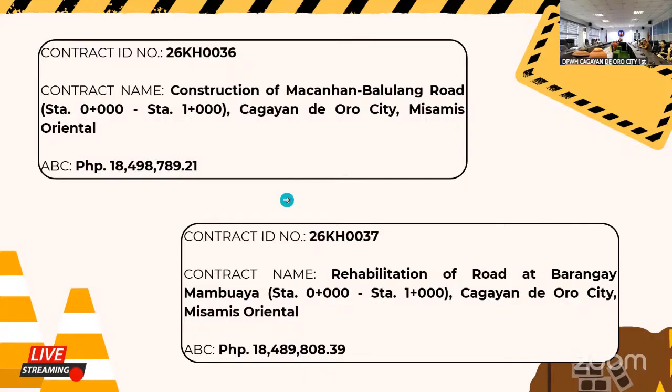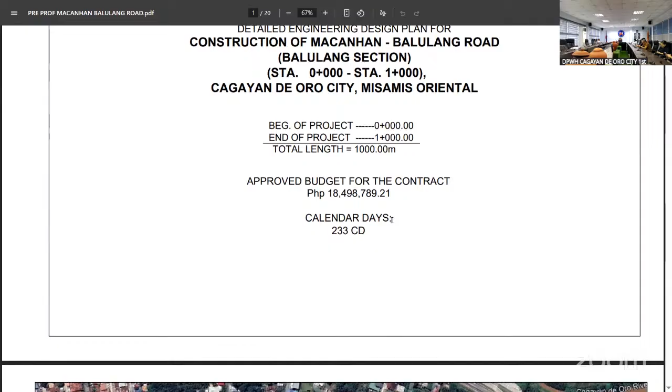Hello, good afternoon, everyone. For construction of Macanhan-Balulang Road, Station 0 to Station 1 plus 00, with approved budget for the contract of 18,498,789.21 and calendar days of 233. Here as shown is the location of the project, starting here at the crossing, going to Balulang, Centro Balulang, and along Macanhan-Balulang Road up to here, near Balulang UCCP, that's the end station of the project.

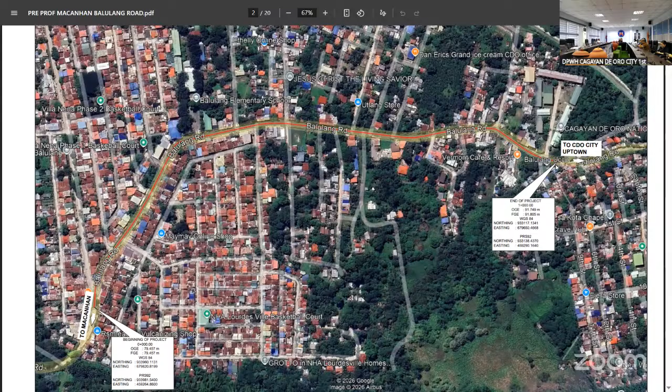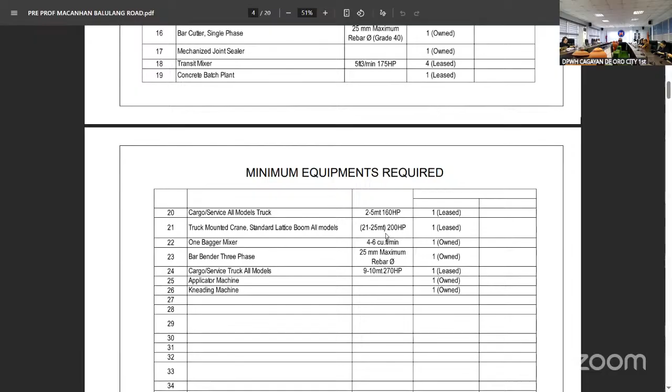For the minimum equipment required for the project, we have: 2-way radio, 3 owned; barricade flasher light, 10 owned; trailer for equipment, 1 lease; trailer for minor tools, 1 lease; backhoe with pavement breaker, 1 lease; payloader, 2 lease; dump truck, 2 lease; concrete saw, 1 owned; bulldozer, 1 lease; backhoe, 1 owned; motorized road grader, 1 lease; vibratory roller, 1 owned; water truck/pump, 1 lease; concrete vibrator, 2 owned; concrete screeder walker truck screed, 1 owned; bar cutter, 1 owned; mechanized joint sealer, 1 owned; transit mixer, 4 lease; concrete batch plant, 1 lease; cargo/service truck all models, 1 lease; truck mounted crane, 1 lease; 1 bagger mixer, 1 owned; bar bender 3-phase, 1 owned; applicator machine, 1 owned; kneading machine, 1 owned; and cargo/service truck all models, 1 lease.

Here are the attached documents: permit to enter, and soil test findings.

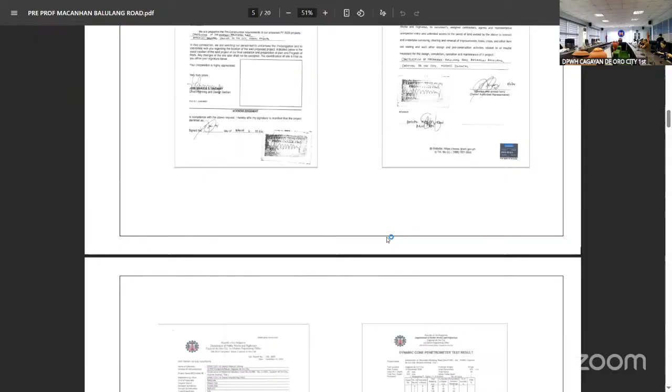For our summary of quantities and scope of work, this project is rehab of existing pavement. Here are the items of the summary of quantities.

For B.3 permits and clearances for excavation permit, 1 lump sum. B.5 project billboards/signboard, per each. B.72 occupational safety and health program, 1 lump sum. B.82 traffic management, 1 lump sum. B.9 mobilization/

demobilization, 1 lump sum. For earthworks, we have 1013 B3 for removal of actual structures/obstruction of 0.23 meters thick PCCP or existing PCCP on site, unreinforced, with a quantity of 5,056.25 square meters.

For 1022 surplus common excavation, we have 188.40 cubic meters. For 1031A structure excavation common soil, we have 21.60 cubic meters for our street light structure. And 1041A embankment from roadway/structure excavation common soil, 65.27 cubic meters.

For 1051B subgrade preparation for existing pavement, we have a quantity of 6,100 square meters. For 2011 aggregate base course, we have 1,220 cubic meters. For our surface courses, 311-1E1 Portland cement concrete pavement unreinforced, 0.28 meters, 14 days curing, quantity of 6,100 square meters.

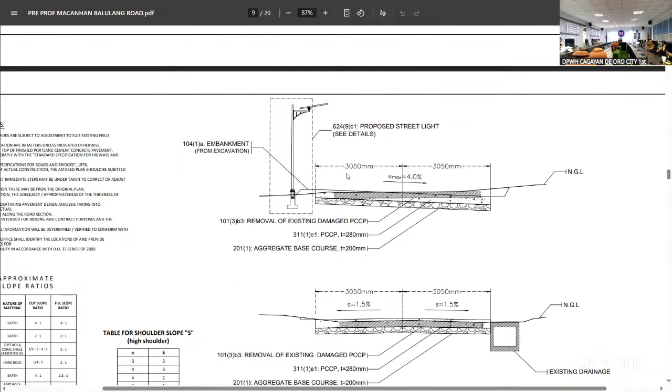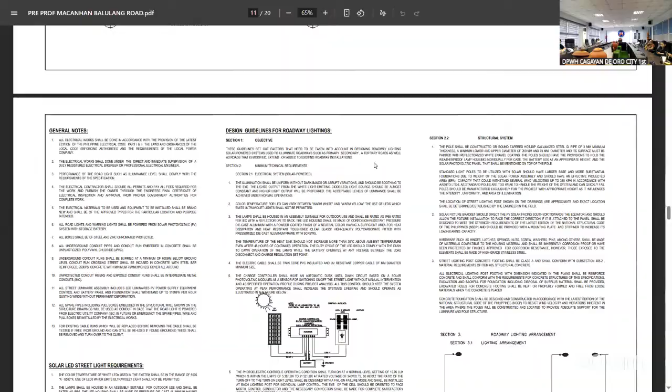Shown here are the typical pavement markings details and typical roadway sections. The shaded part is the existing PCCP and the proposed 3.05 meter lane per lane. Also the typical for reblocking the old pavement for the connection from existing to proposed, and the typicals for the street lightings.

And that's all for construction of Macanhan-Balulang Road. Thank you. Any questions?

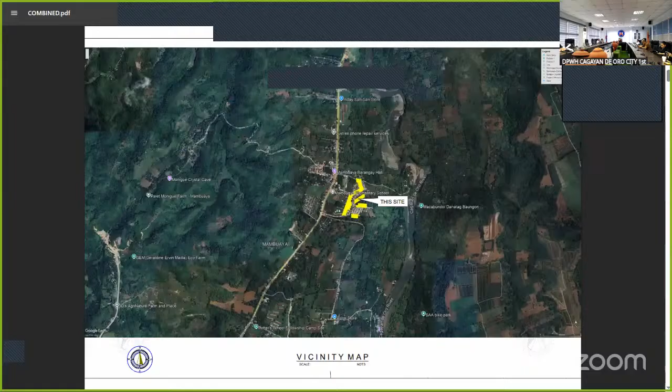So for the general drawing, it is located in Barangay Mambuaya. This is the vicinity map.

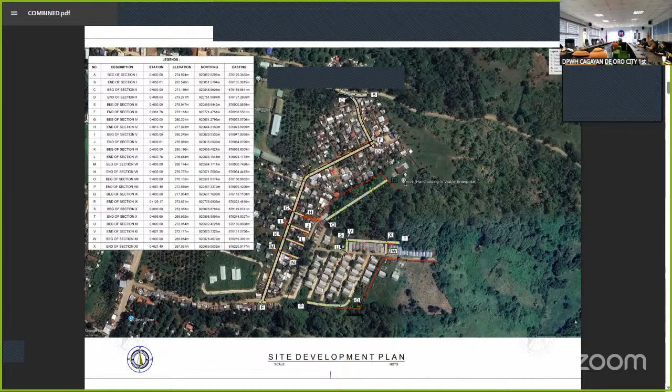This is the site development plan of each section, the 12 sections. This is specifically located at Ecoville. You can see here the site development plan, and here are some of the geotagged pictures.

This picture right here is the image of the remove and replace of existing pavement. We'll be replacing it with 0.28 meters thick PCCP.

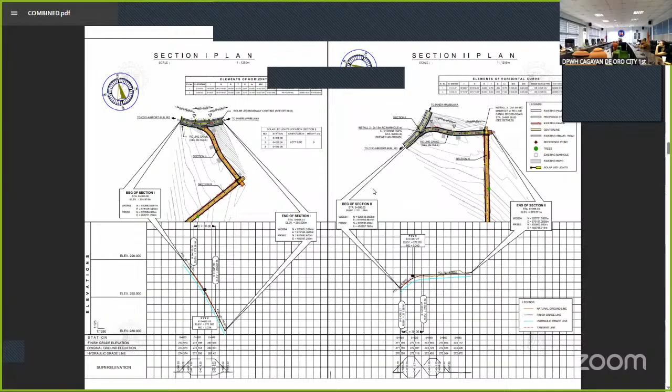For the plan and profile, this is the plan and profile of each section. Section 1 is where the remove and replace of existing paved road occurs, so rehabilitation of road, while the other sections are improving gravel road. Section 1 has only 58.01 meters.

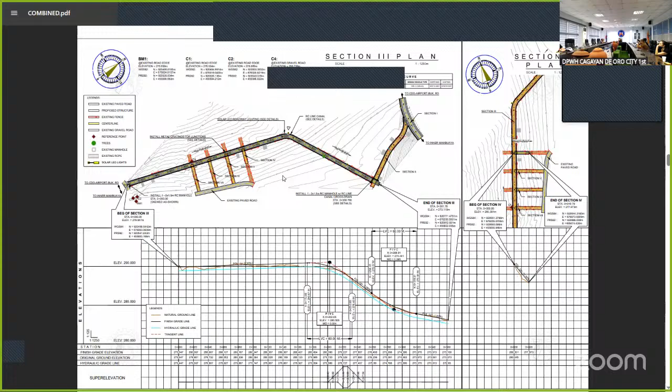And also for section 2, section 3, section 4, section 5, section 6, section 7, section 8, section 9, 10, 11, and 12 - there are 12 sections. This is also the straight line diagram of each section for clarification of scope of works.

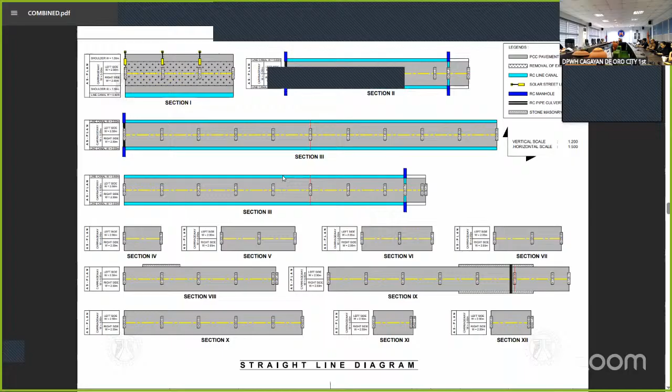For typical drawings, this is the typical drawing for section 1. We have here the rehabilitation of existing road, additional shoulder width of 1.5 meters both sides, and installation of line canal on the right side of the section. Since there's an existing line canal in the area, we will just be tapping the existing one.

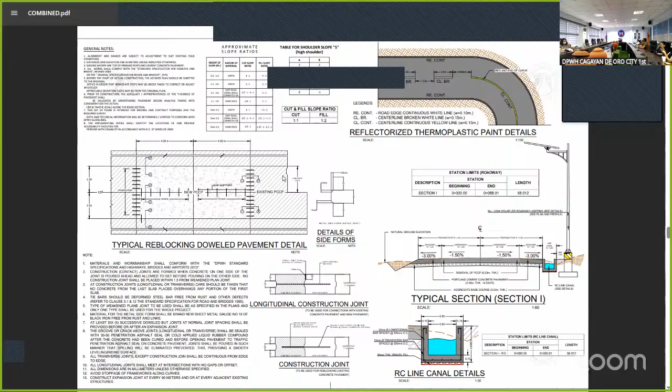Also, all sections will be accompanied with reflectorized thermoplastic pavement marking. You can see the details on the upper right.

For section 2 and section 3, we will have section width of 2.5, thickness of 0.23, and installation of drainages on both sides, open line canal with width of 0.6 each. These are the details, and also the cross drain details.

And there's also sections wherein we will be having slope protection, not very high, probably 1 to 2 meters. Also there's pipe culvert cross drain that will be reinforced by the slope protection. So you can see the details here.

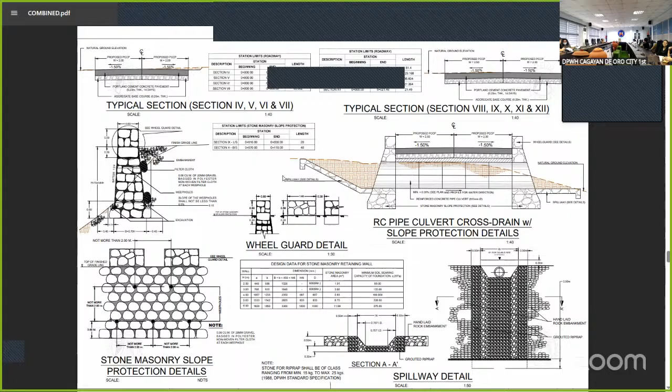There's also sectioning of each typical section so it won't be misunderstood. And for the junctions where we will have the line canal, we will also be installing a metal frame and gratings for each junction. So this is the details and also the station limit.

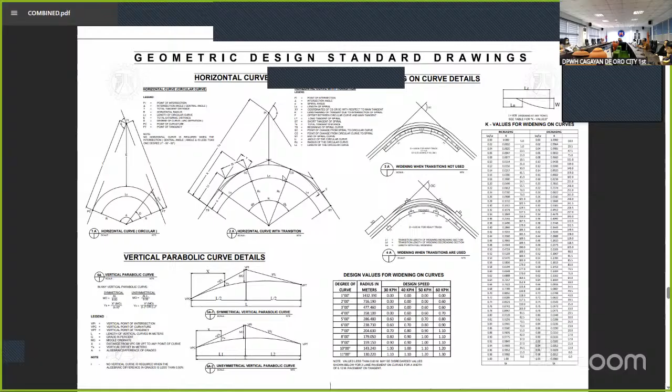For our Portland cement concrete pavement details, the typical details, the geometric design standard drawings. And so for our summary of quantities, we have here.

B.3 permits and clearances, 1 lump sum. B.5 project billboard and signboard, four each. B.7 occupational safety and health program, 1 lump sum. B.8 traffic management, 4.33 months. B.9 mobilization and demobilization, 1 lump sum.

100(3)a2 individual removal of trees, 301 to 500 millimeter diameter, 14 each. 101(3)b3 removal of actual structures, obstruction, 0.23 meters thick PCCP unreinforced, 290.06 square meter. 1022 surplus common excavation, 1,575.52 cubic. 1031A structure excavation common soil, 881.27 cubic.

1041A embankment from roadway structure excavation common soil, 377.06 cubic. 1047 gravel fill, 31.98 cubic. 1071 overhaul, 14 cubic kilometer. 2011 aggregate base course, 1,017.57 cubic. 3111C1 Portland cement concrete pavement unreinforced 0.23 meters deep, 14 days.

4,576.79 square meter. 3111E1 Portland cement concrete pavement unreinforced 0.28 meters thick, 14 days, 464.10 square meter. 4041A reinforcing steel grade 40, 14,996 kilograms. 405(1)a2 structural concrete 20.68 megapascal, Class A, 14 days, 183.16 cubic.

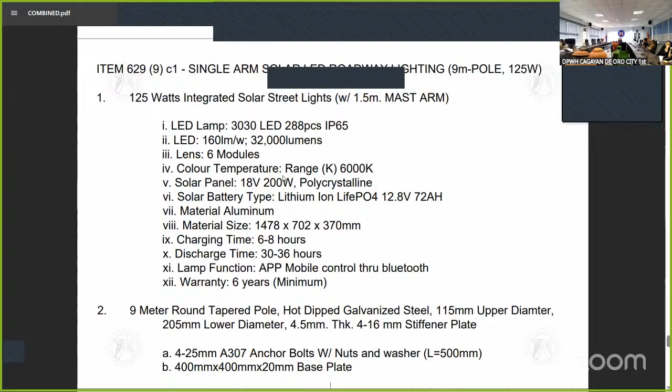So these are the specifications for our solar LED roadway lighting. And for our attachments, our road right of ways and our soil test report for this specific project.

So that's all for this project, sir.

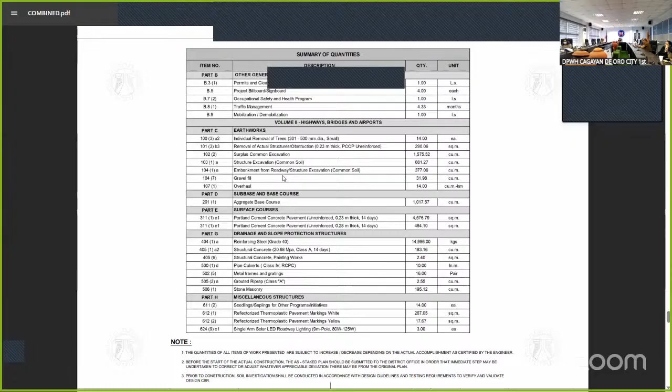So, Alice, we proceed with the third project, 26-0038, rehabilitation of road at Barangay San Simon, Cagayan de Oro City. Please be presented to us by Engineer Jeremy Morales.

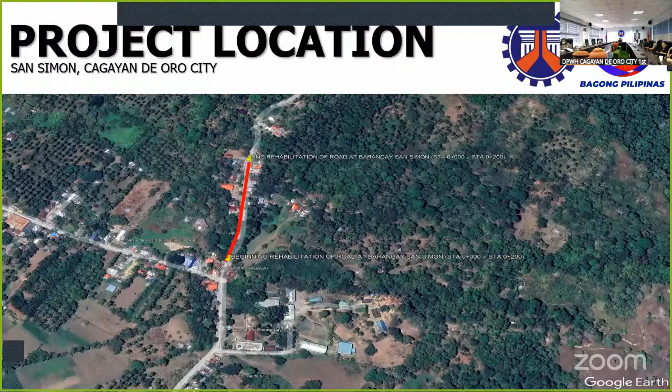For the project location, it is situated near the San Simon Pag-asa building. For the project site development plan, the project has 200 meters in length for the existing road in the location. For the project stationing, the road already exists with 5 meters existing width, thickness of 0.23 meters, and the rehabilitation project will have a new width of 6.1 meters. So the picture shows the beginning station and the end station.

For the project design and profile details, the project includes reflectorized thermoplastic paint details. Also the project includes items of removal of existing PCCP, Portland cement concrete, with proposed PCCP of 3.05 both sides. The project also includes the installation of solar street lights. For the project profile, the picture shows the 9-meter solar LED roadway lighting for this project, including 7 street lights.

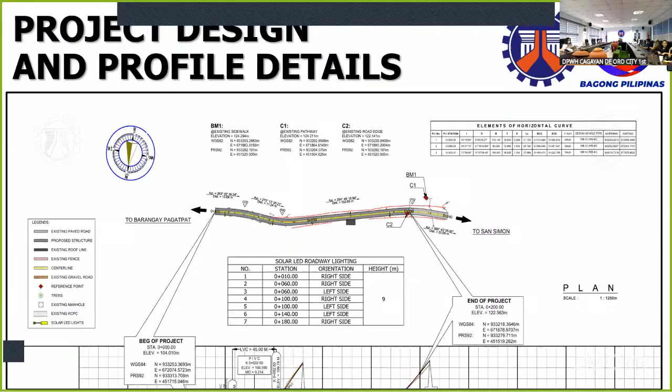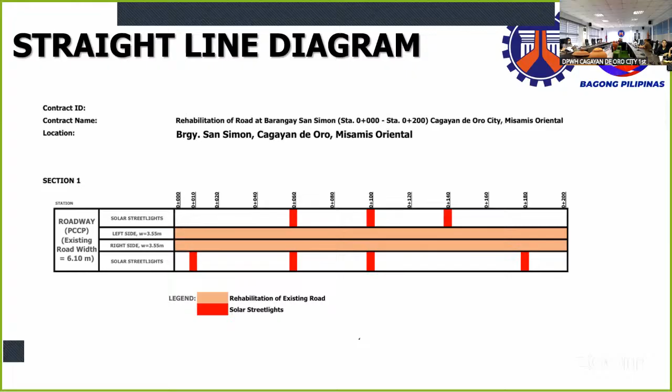For the straight line diagram, these are the following stationings for the solar street lights with PCCP road width of 6.1 meters.

For the summary of quantities: B.3 permits and clearances, 1 lump sum for excavation permit; B.5 project billboard signboard, for each; B.7(2) occupational safety and health program, 1 lump sum; B.8(2) traffic management, 1 lump sum; B.9 mobilization and demobilization, 1 lump sum. For the earthwork...

101 removal of actual structures and obstruction, 0.23 meters thickness, 1,000 square meters. 102 surplus common excavation, 433.96 cubic meters. 103(1)a structure excavation common soil, 15.12 cubic meters used for the streetlight structure.

For the sub-base and base course, we have 201 aggregate base course with 244 cubic meters. For surface courses, 311 1C1 Portland cement concrete pavement, 0.23 meters in thickness, with 1,220 square meters.

For miscellaneous structures: 612 reflectorized thermoplastic pavement markings, white, 48.55 square meters; 612 reflectorized thermoplastic pavement markings, yellow, 14.19 square meters. Lastly, 624 9C1 single arm solar LED roadway lighting, 9 meters in height, 7 each.

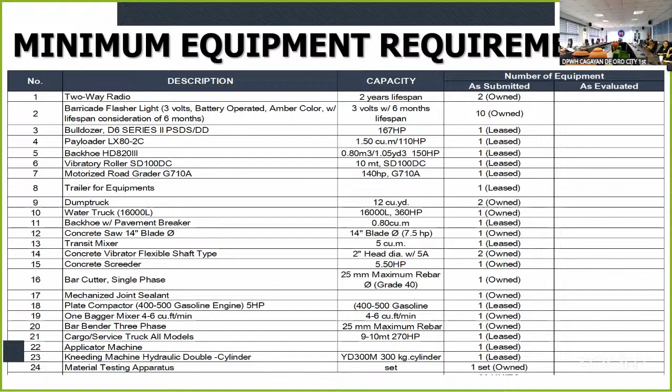For other details, lump sum used for excavation permit as per ordinance number 12860 of 214. For other pertinent documents, the project has already secured permit to enter and barangay resolution, and has already coordinated with the barangay council and residents, ensuring no private property encroachment. So these are the following pertinent documents. Thank you, that is all.

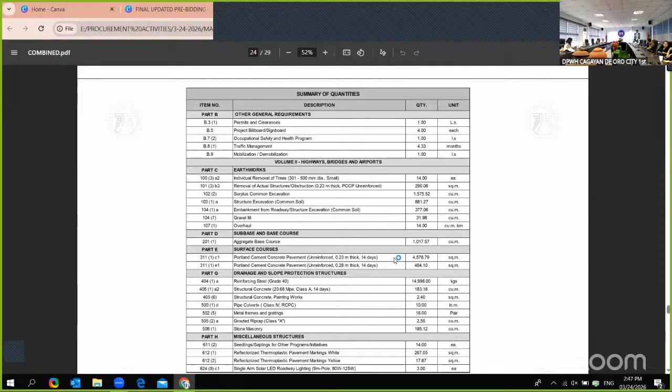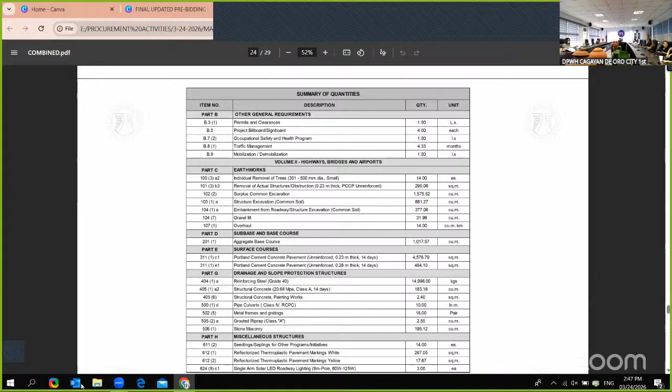26KH0039, construction of multi-purpose building in Barangay Bulua, Cagayan de Oro City, Misamis Oriental. This will be presented to us by Engineer Michael Castelliano.

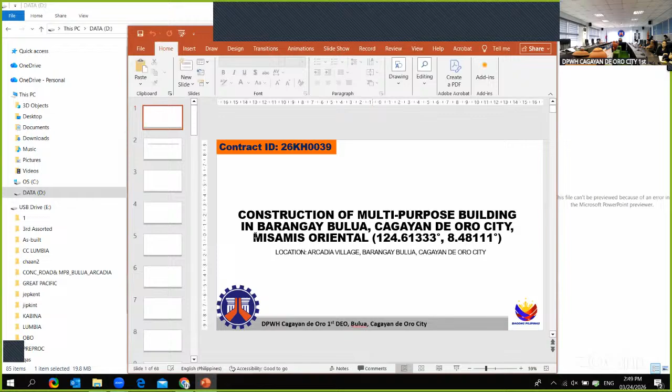Good afternoon, everyone. I'll be presenting the project named construction of multi-purpose building in Barangay Bulua, Cagayan de Oro City, Misamis Oriental, with coordinates 124.61333 and 8.48111, located at Arcadia Village, Barangay Bulua, Cagayan de Oro City, with contract ID 26KH0039.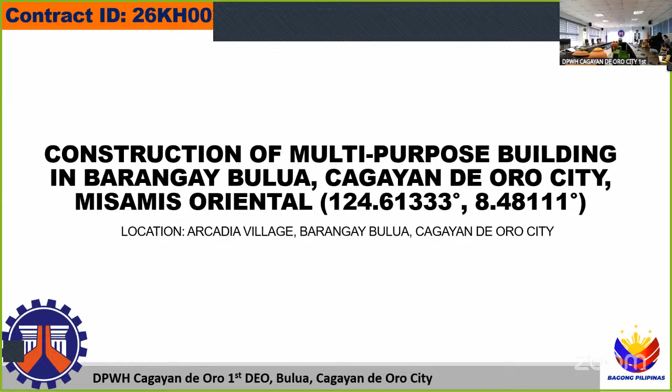The appropriation of this project is 6 million, with an approved budget contract of 5,939,930.67, and a contract duration of 180 calendar days.

Its major categories are BICWO PLC, buildings construction without piles, low-rise concrete frame, and a similar major category BICWO PHC, buildings construction without piles, high-rise concrete frame.

The scope of work for this project is mainly the construction of a multi-purpose building, which is a covered court, and its electrical works, a newly layered concrete basketball slab, the line canal, and removal of a tree, to be seen later.

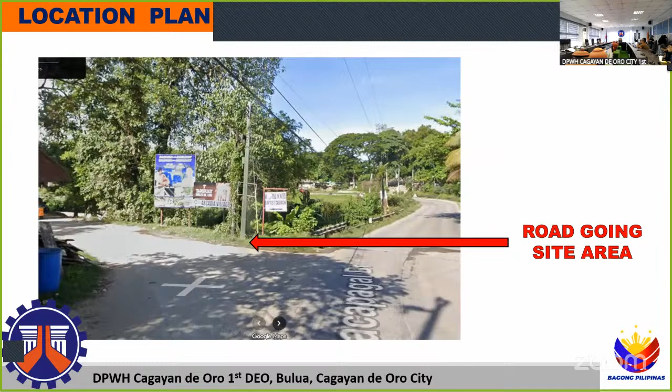For the location plan, from the Macapagal Road going to the site location, reaching this cross-section area, going to this road to the site area, to the Arcadia Village.

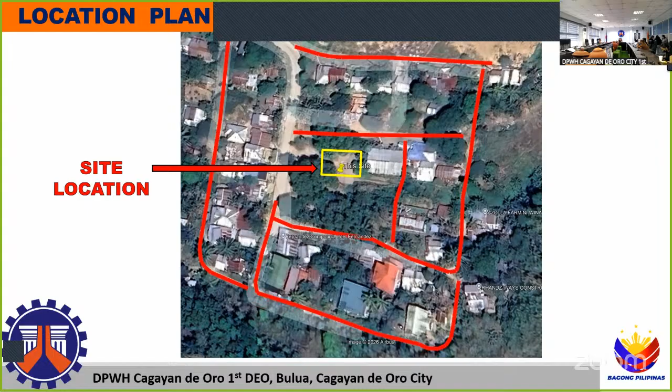In the picture, we have the site location where the project is to be constructed. These are the site photos, and this tree right here is to be removed.

As you can see, there is an existing, slightly damaged concrete slab, to be layered with a new concrete slab.

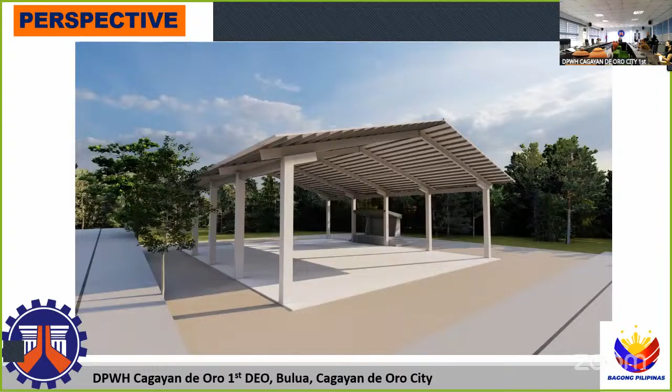This is the perspective of the basketball covered court, with 4 bays and 10 columns overall, with concrete slab and a stage on the right side. This is the truss perspective.

This is the layout plan, the foundation layout plan on the site. From the road section, we have a 3.7 meter setback from the covered court.

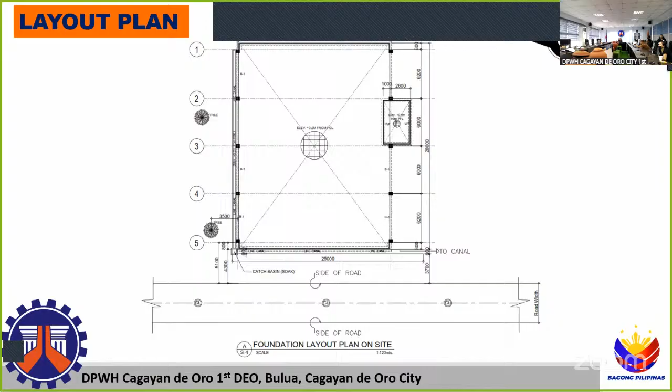For the floor plan, architectural: as you can see, it is provided with a line canal for proper drainage along the covered court perimeter, on the left side and the rear view side. We have a dual slope roof plan, which is a rib type, and the color is to be approved by the end user.

We have a 20 by 24.4 meters dimension for the covered court.

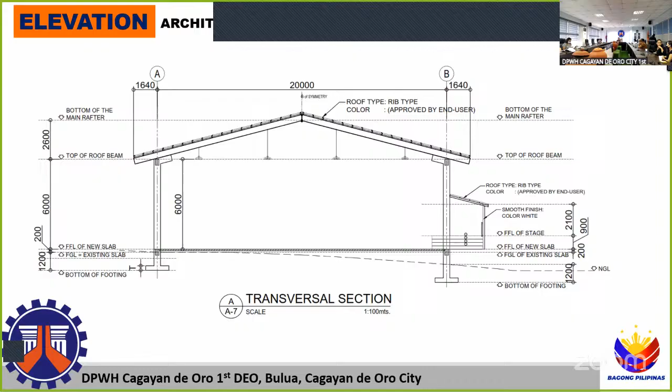So this is the elevation, the transversal section. As you can see, we have a slope on the soil. The reason for the different elevation of the two columns will be discussed later.

So the rear elevation, the right side elevation, left side elevation. And this is the architectural detail for the stage. It's an isometric view. So we have a CHB wall and a 2-inch steel handrail on both sides.

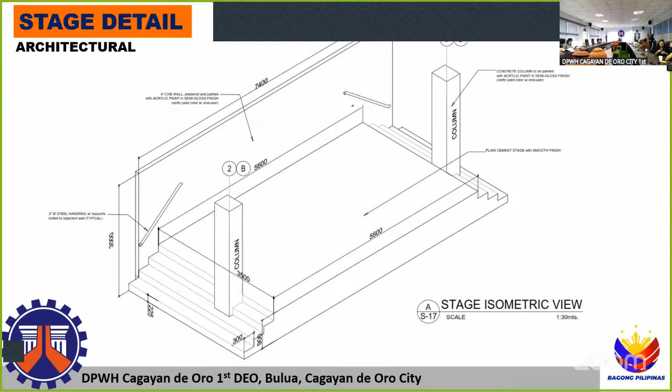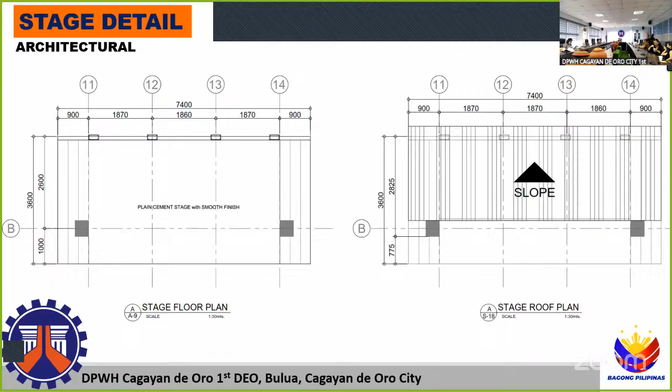So the stage floor plan and its roof plan. The dimension of the stage is 7.4 by 3.6 meters. And this is the front view, left side view, rear view, and right side view of the stage.

So for the structural foundation layout on site, this is the foundation plan with a 100 mm thick concrete slab to be layered, and a roof beam plan.

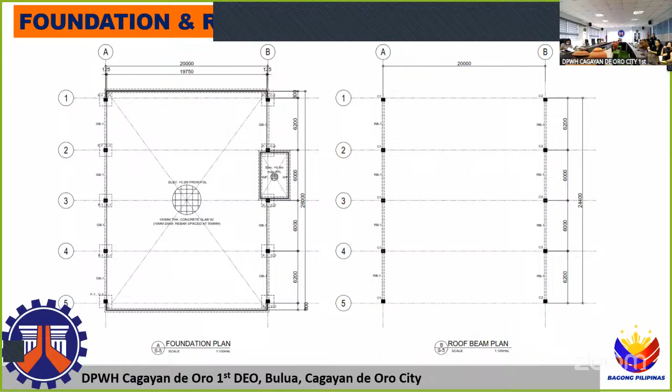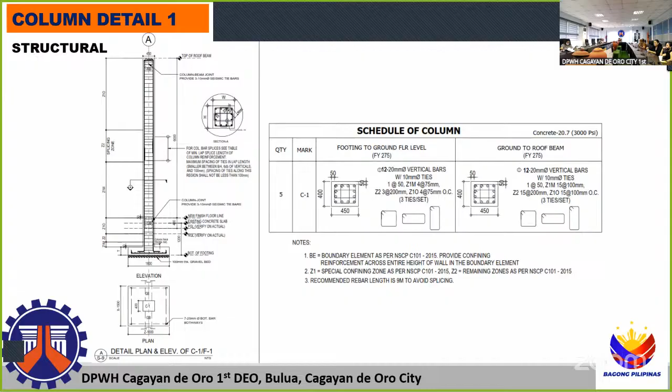So this is column 1 and column 2. Their difference is only the 1 meter elevation of the footing to the ground. They have the same dimension, 400 by 450, just the elevation differs.

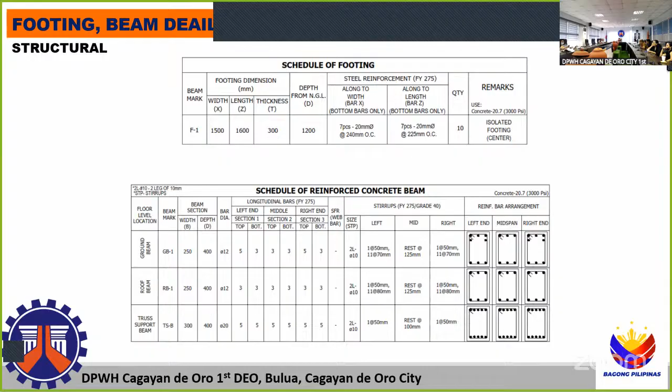So the typical wall tie beam details, the footing details, the schedule of footing, and the schedule of the concrete beams. And this is the structural transversal section.

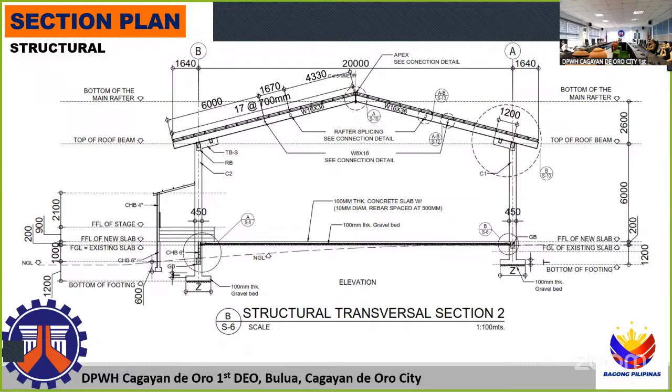And section 1. So structural longitudinal grid A, and for grid B, as you can see, there is a CHB piling for soil confinement to retain the embankment of the soil due to the different elevation.

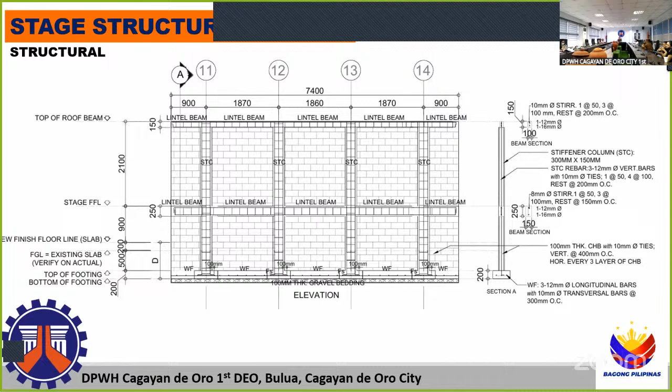The roof framing plan and the roof structural detail for the stage, which has 4 stiffener columns and lintel beams. And the structural detail of the stage, which has a 100 mm thick concrete slab.

So our stage is 7.4 by 3.6 meters in dimension, and the schedule of its columns and footings. For the structure of our truss, we're going to use 16 by 36 for the rafter and 8 by 18 for the lateral support.

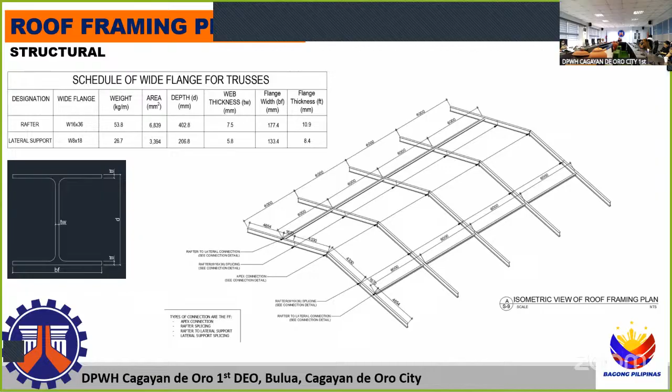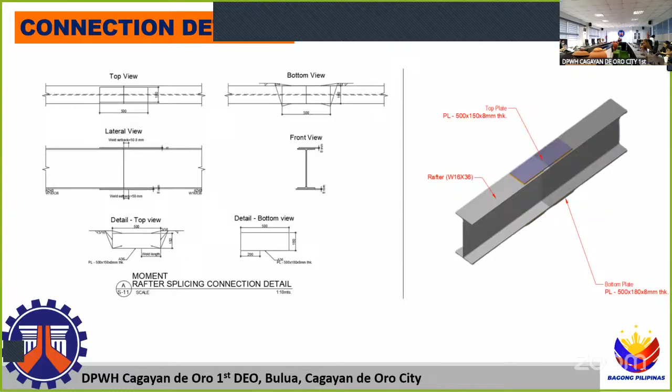So for our connection details, we have the apex connection detail, the rafter splicing connection detail, the shear and moment rafter to lateral support connection detail, and lastly, the shear rafter to lateral support connection detail.

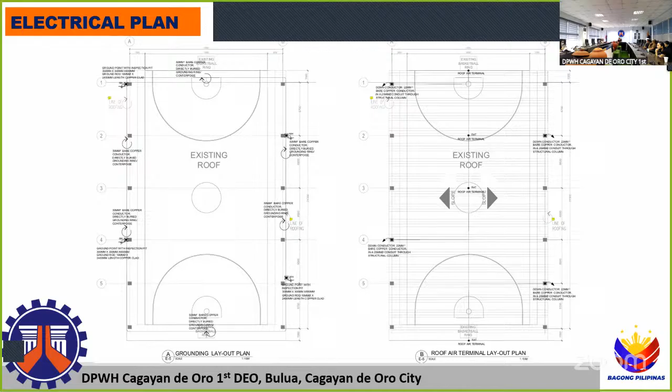So for our summary of quantities, for the general requirements: B31, permits and clearances, 1 lump sum. B51, project billboard signboard, 2 each. B71, occupational safety and health program, 1 lump sum. B91, mobilization and demobilization, 1 lump sum.

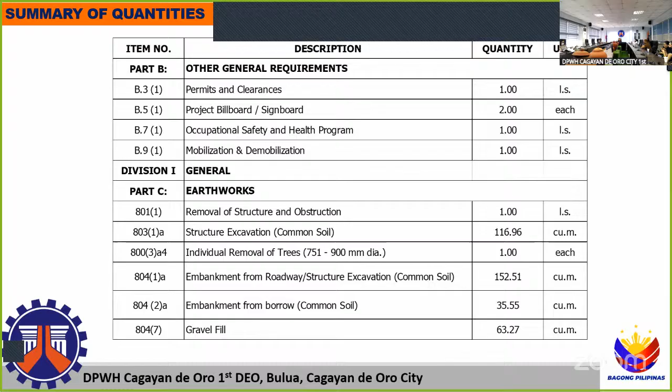For Part C earthworks: 801, removal of structure and obstruction, 1 lump sum. 803-1A, structure excavation, common soil, 116.96 cubic meters. 800-3A4, individual removal of trees, 1 each. 804-1A, embankment from roadway structure excavation, common soil, 152.51 cubic meters. 804-2A, embankment from borrow, common soil, 35.55 cubic meters. 804-7, gravel fill, 63.27 cubic meters. And for reinforced concrete, 901C, structural concrete, 3,000 PSI, Class A, 28 days, 42.13 cubic meters.

902C, structural concrete, Class B, 28 days, 52.80 cubic meters. 902-1A1, reinforcing steel, deformed grade 40, 9,938.58 kilograms. 903-2, formworks and falseworks, 340.61 square meters. And for finishing and other civil works, we have 1013-2A, fabricated metal roofing accessory, 34.16 linear meters.

1014-1B2, pre-painted metal sheets, 727.11 square meters. 1027-1, cement plaster finish, 97.96 square meters.

1032-1A, painting works, masonry concrete, 254.56 square meters. 1032-1C, painting works, steel, 731.71 square meters. 1046-2A1, CHB non-load bearing including reinforcing steel, 100 mm, 55.76 square meters. 1046-2A2, CHB non-load bearing including reinforcing steel, 150 mm, 36 square meters.

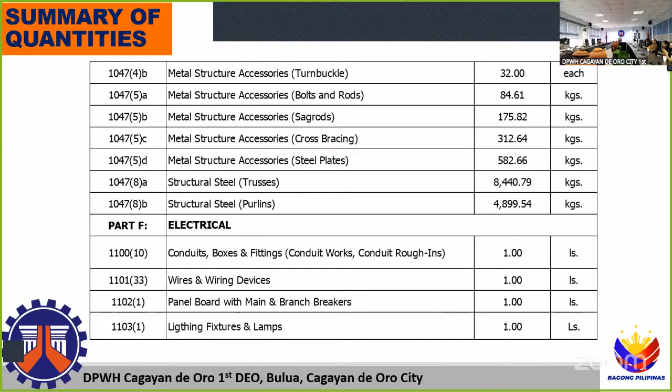1101-33, wires and wiring devices, 1 lump sum. 1102, panel board with main and branch breakers, 1 lump sum. 1103, lighting fixtures and lamps, 1 lump sum.

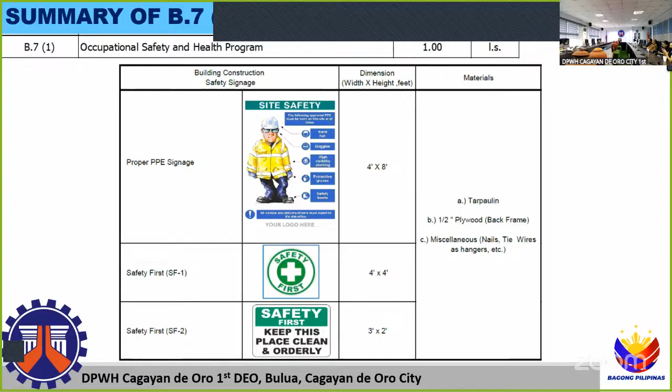So for our summary of lump sums, we have the Occupational Safety and Health Program: proper PPE signage, Safety First SF1, Safety First SF2, hard hat area, danger deep excavation, beware falling debris, construction entrance, construction exit, safety harness required, welding hot work area, authorized personnel only, fall hazard, temporary material stocking area. And for permits and clearances, the building permit, all professionals, and Bureau of Fire as per CDOC ORD number 20860-2014.

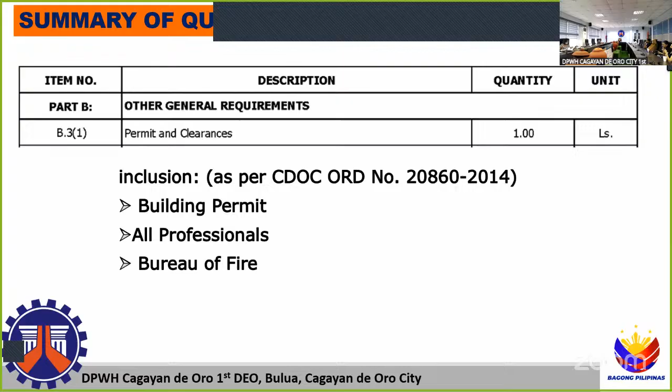And for the lump sum for our conduits, boxes, and fittings: wires and wiring devices, panel board with main and branch breakers, lighting fixtures and lamps.

For our minimum equipment requirement, we have: stake truck cargo, 1 unit owned; concrete vibrator, 2 units owned; backhoe, 1 unit leased; dump truck, 1 unit owned; 1 bagger mixer, 1 unit owned; bar cutter, 1 unit owned; bar bender, 1 unit owned; welding machine, 1 unit owned; cutting outfit, 1 unit owned; material testing apparatus, 1 set owned; minor tools, 1 set owned; boom truck, 1 unit leased; plate compactor, 5 horsepower, 1 unit owned.

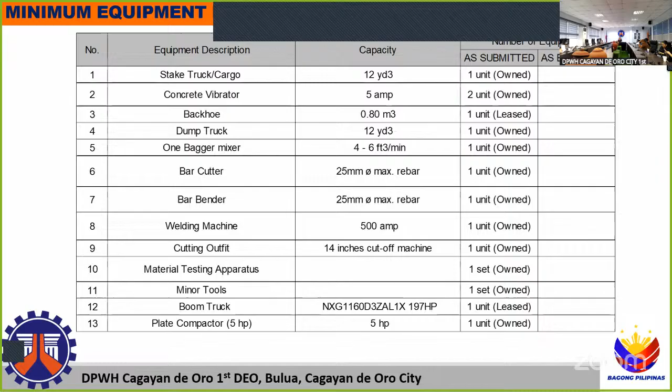As per the summary of quantities, it is subjected to a bid bulletin for the additional hauling rates for the rental of equipment. So that is for this project. Thank you.

Thank you. Do you have any questions? Yes. Good afternoon, Mr. Chair.

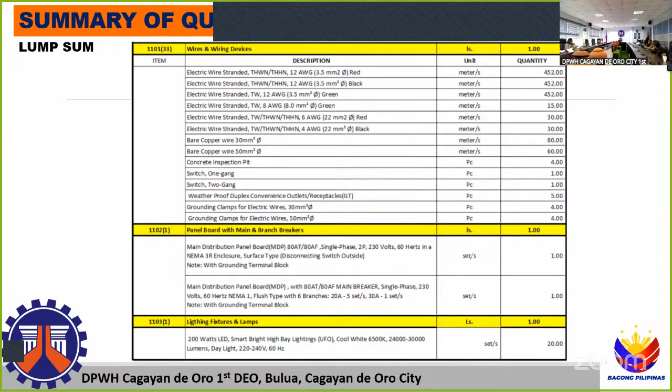So if there is none, thank you very much, Engineer Mabel.

That's all for the presentation of the details of the 4 projects. Now let us proceed with the second part, which is the instruction to bidders, the requirements. Thank you, Engineer. And for this, I would like to call on the Engineer to share that.

Yes, sir, there's an online question. From Adrian Machio, 1430: Good afternoon. I want to ask if procurement requirements vary per project in your office. If yes, would you please specify what types of requirements or project-specific details apply?

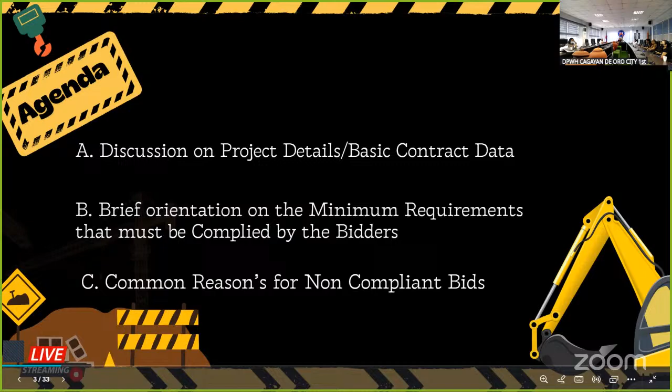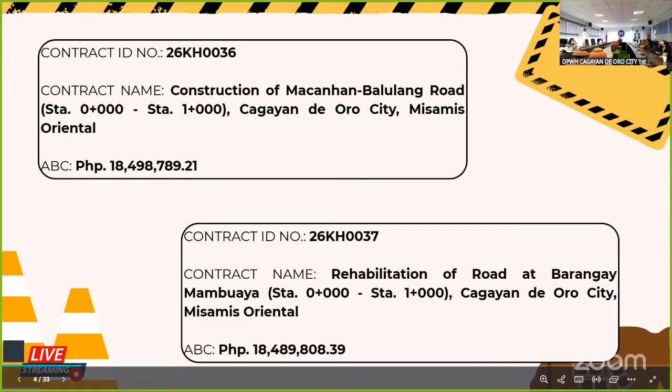We will be discussing the procurement requirements and procedures for these infrastructure projects. Our agenda includes a discussion of project details, basic contract data, a brief orientation of the minimum requirements that must be complied with by bidders, and the common reasons for non-compliant bids. Here we have the infrastructure projects with their corresponding contract IDs and approved budget for the contract.

For the procurement schedule, the buying of tender documents is until April 6, 2026 at 9:30 AM only. The deadline for submission of bids will be on April 6, 2026 until 10 AM, and the opening of bids will follow right after the deadline or the dropping of bids.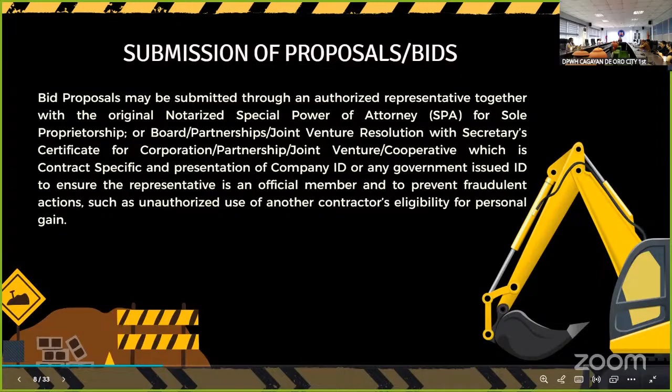Bid proposals will be submitted through an authorized representative together with the original notarized Special Power of Attorney (SPA) for sole proprietorship, or board/partnership/joint venture resolution with secretary's certificate for corporation, partnership, joint venture, or cooperative, which is contract specific, and presentation of the company ID or any government-issued ID, to ensure the representative is an official member and to prevent fraudulent actions such as unauthorized use of another contractor's eligibility for personal gain.

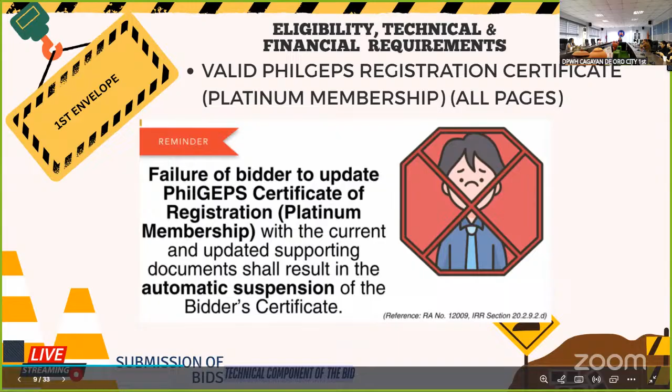Next, we have the first envelope, wherein the bidder must provide a valid and updated PhilGEPS registration certificate, platinum membership. Failure of the bidder to update the PhilGEPS certificate of registration shall result in automatic suspension of the bidder's certificate.

Next, the bidder must provide a statement of all its ongoing government and private contracts, including contracts awarded but not yet started. Please take note that failure to disclose the required information, or providing incomplete or false details, may result in disqualification from the bidding process.

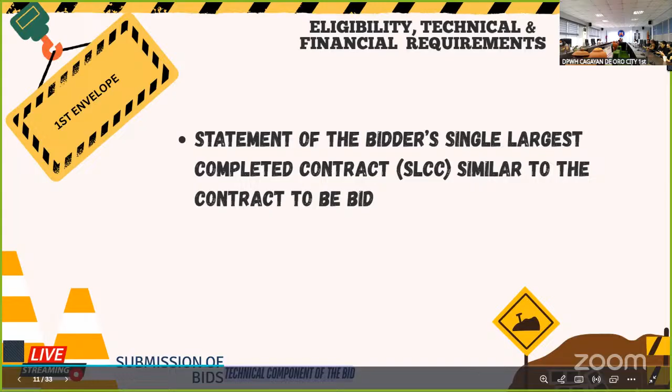Next, the bidder must provide a statement of the bidder's single largest completed contract, or SLCC. The bidder must also provide the PCAB license, or a special PCAB license for joint ventures.

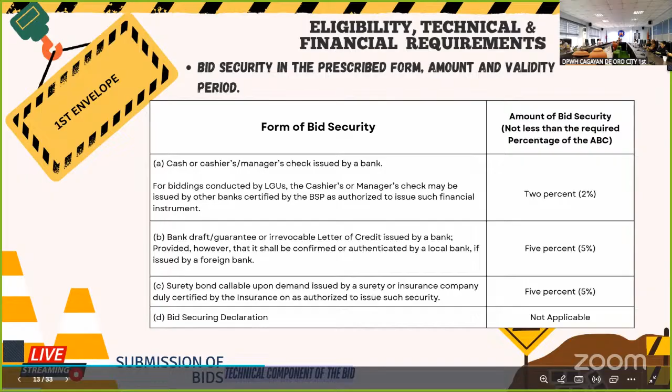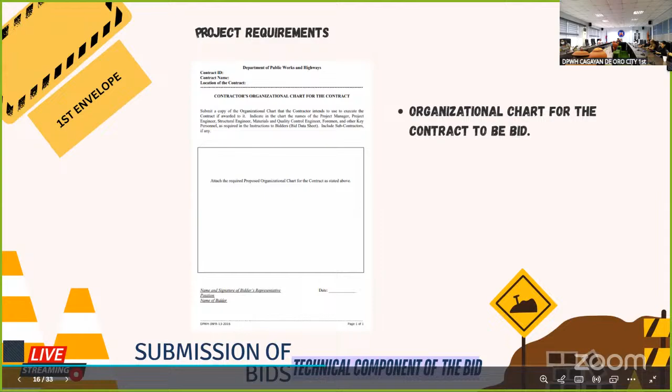Next, the bidder must provide an organizational chart for the contract, along with the list of contractor's personnel and the list of contractor's major equipment units, which are owned, leased, and/or under purchase agreement. See the attached bidding documents for the required years of experience for key personnel and the required number of units for major equipment.

Here we have the standard form for the key personnel, and the standard form for the equipment.

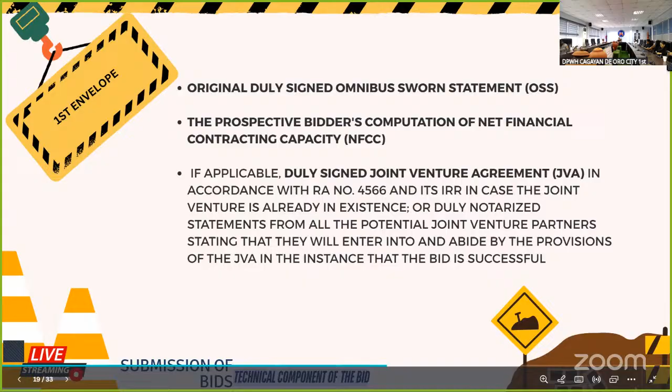Next, for the second envelope, the bidder must provide an original and duly signed financial bid form, bill of quantities, detailed estimates, and also the cash flow by quarter.

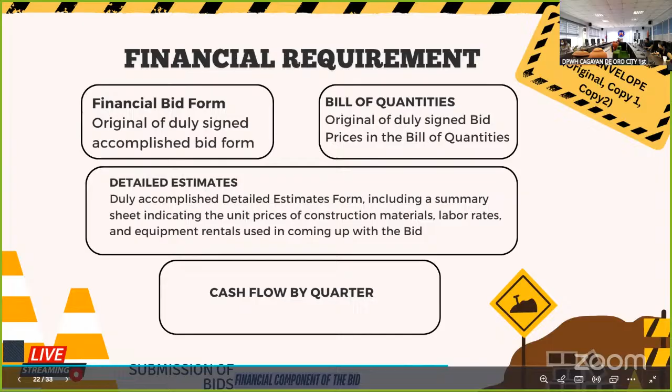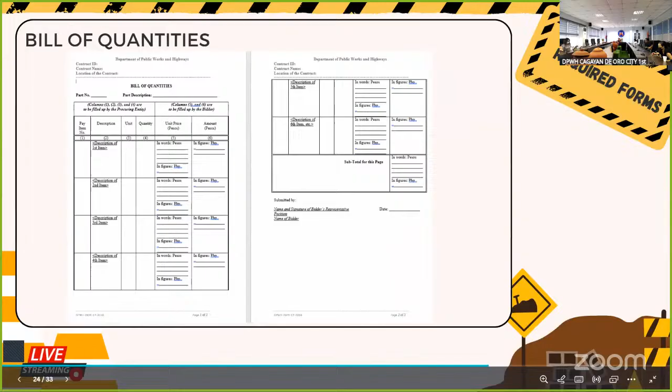Here we have the standard form for the bid form, the standard form for the bill of quantities, the standard form for the detailed estimates, and the standard form for the cash flow by quarter.

Next, we have the common causes of non-compliant bids, based on observations from previous procurement activities. First, missing or incomplete required documents, unsigned or improperly signed forms, incorrect or inconsistent computation in the bill of quantities or financial proposal, expired or invalid licenses and permits, non-compliance with specified technical requirements, and failure to use prescribed forms. These are the preventive measures and recommendations.

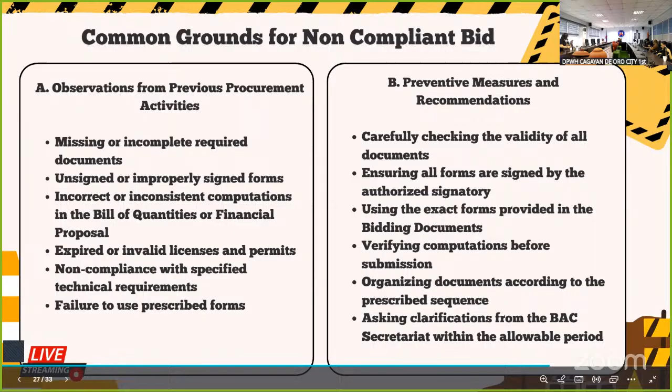First, carefully check the validity of all documents, ensure all forms are signed by the authorized signatory, use the exact forms provided in the bidding documents, verify computations before submission, organize documents according to the prescribed sequence, and ask for clarifications from the BAC secretariat within the allowable period.